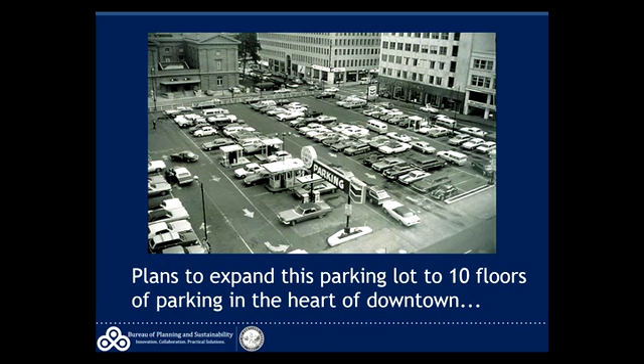Back to the picture of the parking lot, residents were beginning to see the need to quit paving over such wonderful spaces, and there was sort of a revolt when there was a proposal here at the site for a 10-story parking garage.

The result was this: Pioneer Courthouse Square, what we often call Portland's living room. It's a multi-use space right in the center of downtown, our version of an Italian piazza.

And similarly, I think the revolt against growing larger, like where I came from, Los Angeles or Texas City, all of that was kind of growing stronger.

As a result, we started thinking about transportation issues. We shifted the highway that was along the harbor, shown in the picture on the left, and in its place built Waterfront Park. If Pioneer Square is our living room, then Waterfront Park is more or less our front step. It offers a way for people to meander along the river as they head into downtown.

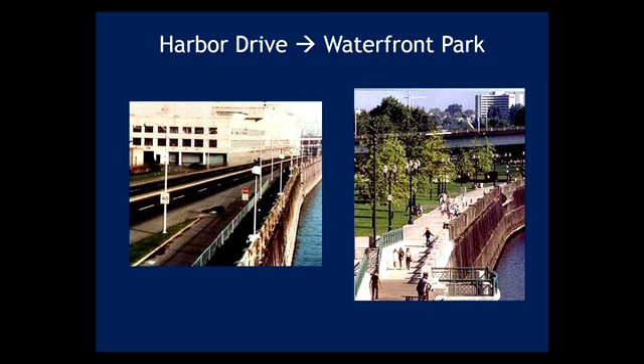The desire to continue building freeways, however, was very strong in many people's minds. This is a map drawn in the 70s and 80s showing all the new freeways we were going to have in Portland.

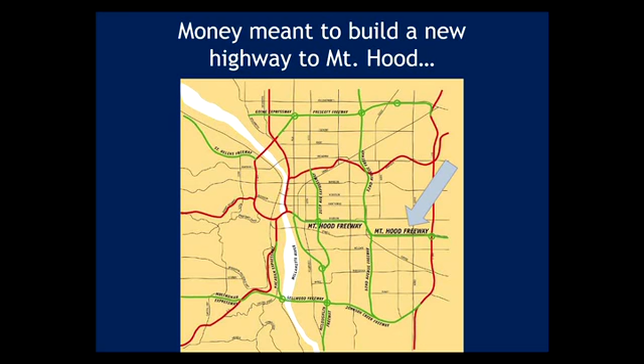I think there were at least 7 new freeways proposed, but our mayor at that time led another revolt all the way to Congress and used money that was dedicated for what's shown there, the Mount Hood Freeway, and built our first modern light rail line.

And we now have light rail in all directions, miles and miles of both light rail and streetcar. That first decision to shift huge federal, state and local resources away from the car and into public transit was sort of a watershed moment for Portland.

Cities all over the world are doing this now. At that time, we had the tool of tax increment financing, and we brought together tremendous public and private resources to develop what became the Pearl District.

The goal was to have 5,000 units of housing in this area. We now have close to 9,000 units, with hundreds and hundreds of companies and retails in this area and some wonderful parks.

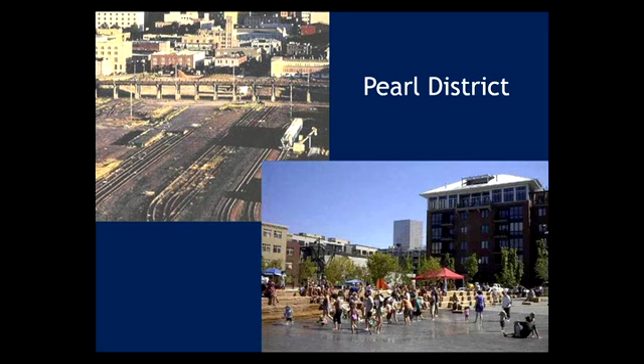So from that slide at the beginning, the long-term framework that the State of Oregon requires every local government to pursue, establishing how it's going to grow over the next 20 years, has actually been a really important part, and in a lot of ways a model for the work we do on issues like climate change, where there's nothing solved overnight with a few quick and easy policy or program investments. This is something that requires a systematic approach, long-term institutional change to deliver over time.

In Portland, we're really fortunate that the work on climate started so many years ago, more than two decades now, and Susan herself was instrumental in the very first carbon dioxide reduction strategy in 1993, 5¼ inch floppy diskette and all. We'll use these plans as a framework to talk through some of what I think really does differentiate Portland today.

It's also true that some of this is a cautionary tale, where we've been working on this for 20 years, and we still have a very long way to go. So we should be clear this is a marathon, not a sprint. We are making good progress, and we all really need to redouble our efforts to get there.

In that spirit, Portland now is on its 4th generation climate action plan. This one was adopted just a few months ago, and lays out essentially our trajectory for the next 5 years en route to this long-term goal of reducing emissions 80% by 2050.

And the previous work really is beginning to produce results. These are, I think, things more typically associated with Portland than the haze and brown cloud of the very first picture we showed. So we're now seeing significant reductions in energy use, a big decline in gasoline use per person.

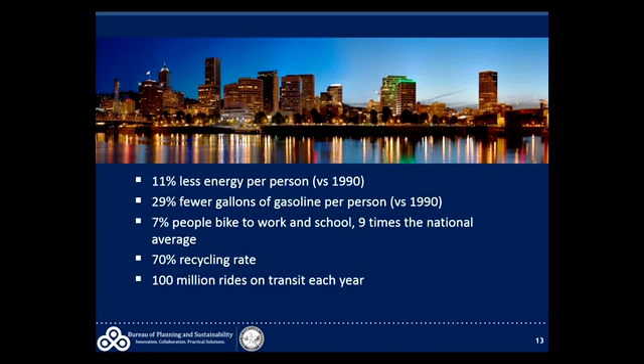We've got a bike commute rate that's now over 7%, 9 times the national average. Recycling is 70%. Transit ridership has doubled since 1990. The list of accomplishments just continues.

These are the things we love to talk about, and we will share these on this call. We'll also try to point out some of the areas that we're still wrestling with, and we get a lot of value from other cities in comparing notes on what works and what doesn't. We hope this can be in service to that kind of shared effort.

So green building, solar, eco roofs, investing in our natural infrastructure, and also working in our own city government. This has been a long-standing priority since the early 90s, and we're now able to point to utility bills that are $7 million less than they would be on a business-as-usual trajectory.

When we can illustrate how carbon reduction can drive economic and efficiency benefits in our own operations, that gives us a great platform to work with others in the community on.

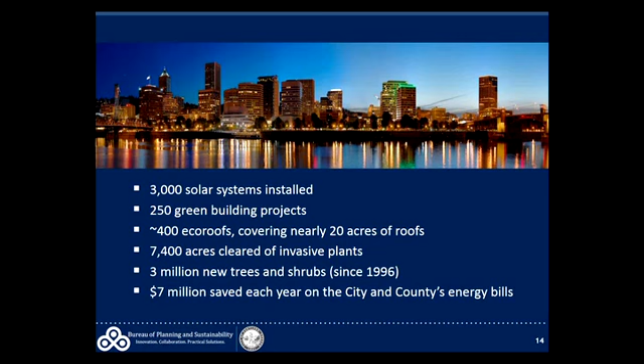So you put all of these together: energy, land use, transportation, recycling, waste reduction, all of these efforts, to get carbon emission trends, and this goes back to 1990. You can see the carbon numbers for Portland, here labeled Multnomah County because we do this as a joint city-county effort, and it is important to our efforts that this is not just the city, but we're working together with the county.

County-wide, our emission numbers are down 14% since 1990, and on a per-person basis, that's a reduction of 35%, since we've had really sustained population growth since that time.

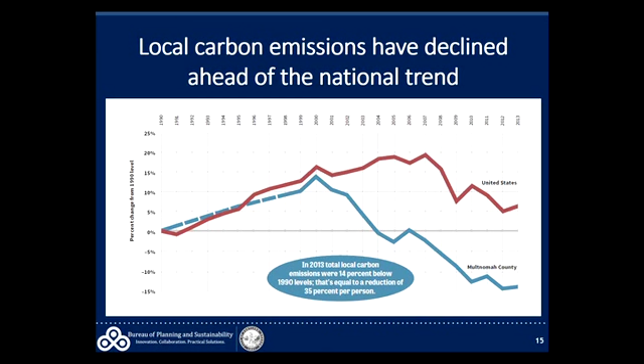It's both heartening to see the departure from the national trend, because I think work here began in earnest earlier. It's also really important to see that national trend bend down as well. We'll see what the numbers look like as we get into 2014, 2015. Certainly, we think we're going to be able to continue to reach this globally. We hope that the national trend follows that same pattern.

Equally importantly, I mentioned the population growth over that time, so up about 30%. We've also seen another 75,000 jobs added to Multnomah County. So even though emissions are falling, we're growing in population, we're gaining jobs. This is also a really important illustration of how it is possible to decouple local growth from carbon emissions.

We show this slide to visitors from China, and they take a picture of it. So I think it's an important model and trend that we need to continue ourselves. We all have an interest in seeing this pattern replicated elsewhere.

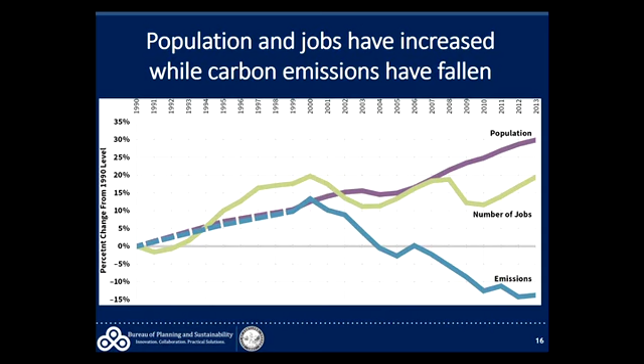We also know we have a ton of work to do ahead of us. So from that peak around 2000, emissions now are on a trajectory locally to get to this long-term 80% reduction goal. We've got an interim goal of a 40% reduction by 2030, so each on this 1.5% decline per year to get there, then step it up a little bit on down to 2050. But we are very roughly on track for the moment, and we've got our work cut out for us to reach those targets.

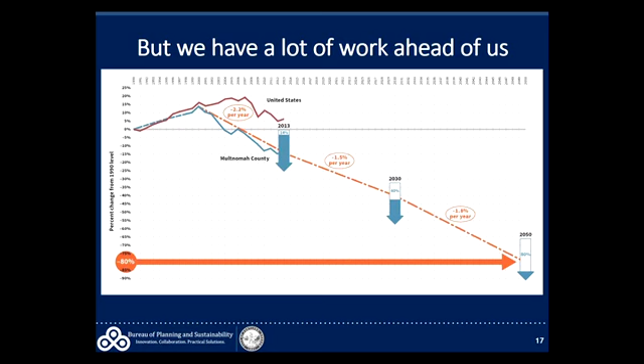Even while we've got these long-term carbon reduction goals, we're looking at continued growth, and that creates a lot of opportunities in terms of how the community is shaped, our transportation systems, how people get around, and what's close to them. We're seeing opportunities to build out neighborhoods that are more walkable, well connected by transit, by bike paths, and other transportation options, and we're going to need those things if we add these 270... this must be on the next slide.

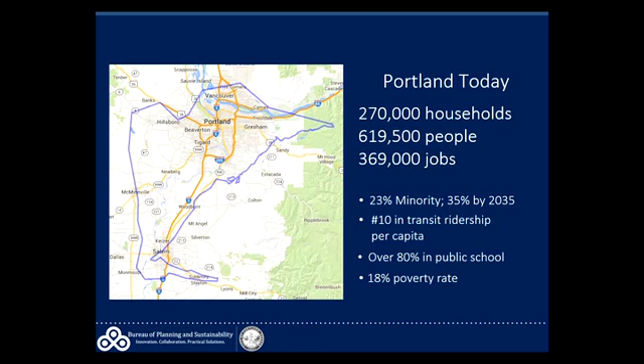To our current 270,000 households, we're expecting another 120,000, so 2% annual growth, and expecting another 140,000 new jobs. This is over the next 20 years. We're planning for that, and our comprehensive plan shows that we can accommodate all of that growth within our existing land boundary.

And that's a really fundamental intention here, that this is how we're going to grow. We're going to grow up, not out, and we're going to serve that growth with really good transit, walkable neighborhoods, and transportation options, and we're going to do our best to keep that affordable, both in terms of the cost of housing and the cost of owning and managing our transportation needs.

This is really where climate work fits in this larger context. If all we succeed in doing is reducing carbon emissions, we're absolutely not getting to our goals. In the introduction, there's a reference to the Portland Plan, a citywide strategic plan adopted a couple of years ago, which very clearly articulates our goals to be a healthy, prosperous, and equitable community, and we need to be achieving those even while we're growing and reducing carbon emissions. So if we do our carbon and sustainability work, it's integral to be advancing these other community priorities at the same time. That's not always easy, but it often is doable if we're really deliberate about it.

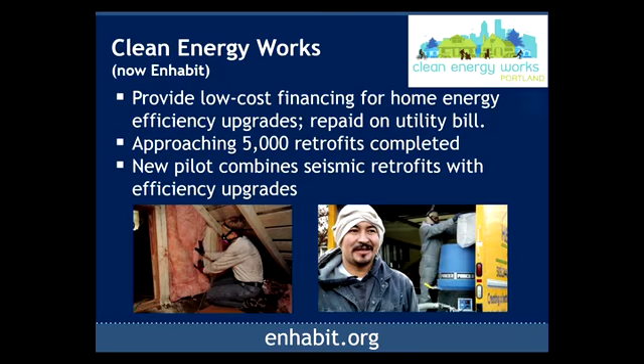And now Clean Energy Works is also looking at upfront cash for solar. You may not think of solar and sunny Portland in the same sentence, but we do have relatively strong support for solar and for other renewables, wind and others, with statewide tax credits and incentives.

Many people also probably think of the Northwest as that place that runs totally on the power of the Columbia River, and that's just not true. It is pretty true for Seattle because they were smarter than we were in that they created a public utility very early on, and the federal government gives sort of first dibs on federal hydro projects to publicly owned utilities. So we get some of the benefits of that whole system, but not like Seattle.

Anyway, we get our power from two private electric companies, and one of them, in particular, Pacific Power, is still a major coal power generator. So those coal power plants are not in Oregon, they're in Montana and other states, but the power is then transmitted to Oregon. We do have one coal-fired plant still in the state.

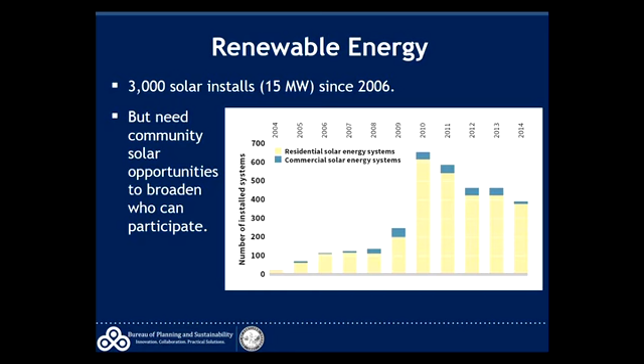Funding for that effort pretty much died out for a little while in 2013, but we have been able to keep a lot of the momentum going. The program that really made the big shift for us was very

neighborhood-based, and we called it Solarize Portland. How it worked was neighbors would join together, and anywhere from 30, 40, 50 or more households would agree to buy a solar PV system. And then we would help them with the technical issues to make a bulk purchase with a request for proposals that would then come in, and all that together would help to reduce costs significantly.

A lot of what we did really was just kind of hand-holding almost and kind of sorting through the issues. When you go to do something like this on your own, it's kind of scary. When you go and do this with all your neighbors, it's not only not scary, it's sort of an empowering kind of thing for the neighborhood to do. So it's been super successful.

We actually got the funding to do this, so I think this is important for other cities, from our Economic Development Fund at one point, to manage and kind of coordinate the effort. Once the recession hit, some of those funds have dried up, but we felt like there were huge job opportunities, and we wanted to be able to actually use some seed money from economic development to show that indeed you could have a major impact on job creation locally, because when you do these projects, so much of it is labor.

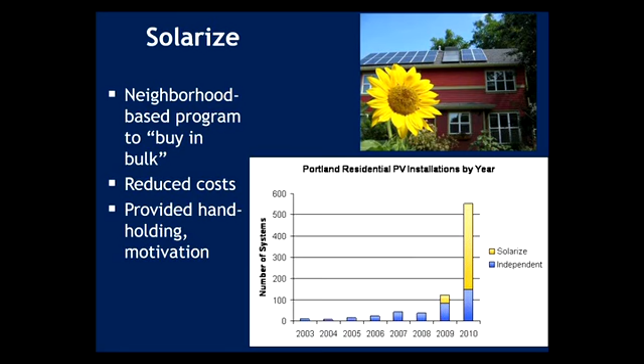Michael. All right, so changing gears to urban form and mobility.

I mentioned earlier that a really fundamental piece of our climate strategy, and really our comprehensive plan, is to create walkable neighborhoods where people can access most of the things they need on a daily basis on foot, and then you connect those neighborhoods by convenient, affordable transit and bikes. And so that's really what our mobility strategy is based around.

We are growing. Our intent is to build up, not out. We have the zoning to do that. We're making some updates to it right now, but there is plenty of room, and it's going to make all of these systems much more efficient and much more affordable as we make better use of existing infrastructure.

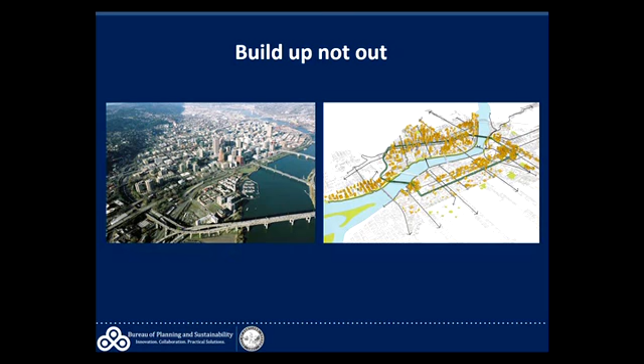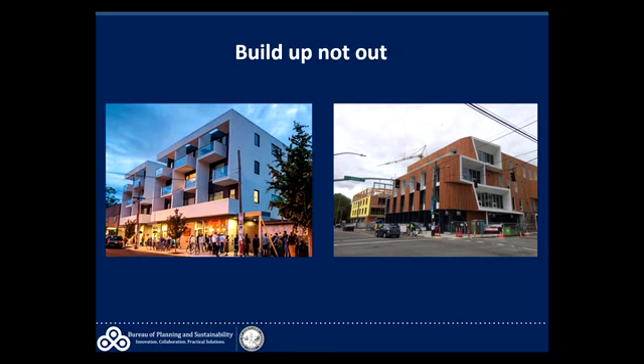You see some of the examples of the development we're seeing along our transit arterials, and this illustrates the human scale of Portland. We're not a skyscraper town. We've got a lot of this kind of neighborhood Main Street scale of development, very lively street level retail, lots of activities, pretty nice feel to it, and we've got a lot of room for more of that. So a lot of our investment is channeled in these directions.

On the east side of town, we have areas that were annexed to the city much more recently, many in the 90s, so they developed without the same development standards that are routine in urban areas, and they literally don't have sidewalks. These are big investment needs, and this helps reveal that and focus our resources to serve those areas in the long run with walkability.

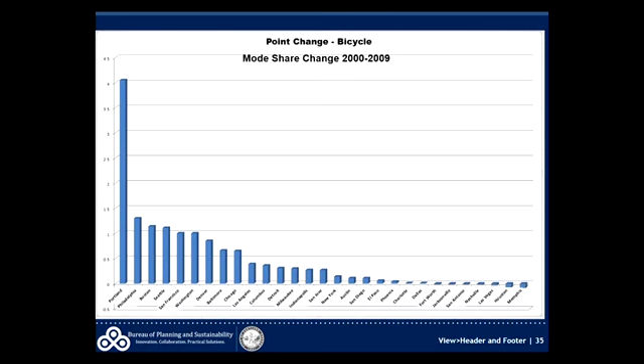One of the really compelling examples of this in Portland is a new bridge across the Willamette River in downtown Portland. This was under construction probably last year. This bridge was completed and opened to the public just last month. It carries light rail, streetcar, buses, bicyclists, and pedestrians. It does not carry cars.

As an example of the kind of investment where we are putting our money where our mouth is on this - this bridge is the kind of infrastructure that we are going to want in the future, and so we're putting our money into it.

It's also a good example of climate-proofing, future-proofing infrastructure against climate changes, where the Willamette River here is tidally influenced - so we're upriver from the ocean, but the river levels are influenced by tides. We reran numbers based on some of the climate projections and realized it was in our interest to raise the bridge span a little higher than the original design. So the engineers went back and changed that design, and we're a little better future-proofed against climate changes. It's a really fantastic experience.

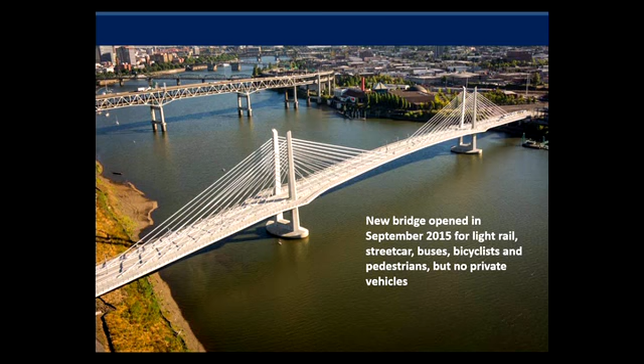One of the things that surprises me about going over the bridge that I really, really love is how quiet it is. This bridge doesn't have the rattle of wheels of many, many cars and trucks, and it's a very peaceful experience. So not only are you getting less air pollution, but you're getting less noise pollution. I like going across it.

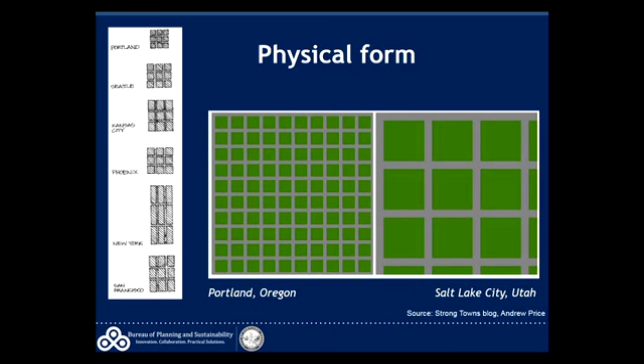From this next map, you can see that not all of Portland has these great blocks, including the eastern portion of the city that Michael mentioned earlier when showing the picture of the 20-minute neighborhood. When we say a 20-minute neighborhood, we mean that within 20 minutes you can walk and get access to pretty much all the things you need on a daily basis: stores, libraries, parks, beer and wine, restaurants, and other important features. So much of the city does have that, but not all of it.

Part of the eastern part of the city was actually annexed about 25 to 30 years ago, and it pretty much resembles much of suburban America, much of suburban Portland. Some areas even have a semi-rural feel: large blocks, lots of missing streets that were never developed, and unfortunately large areas without quality sidewalks.

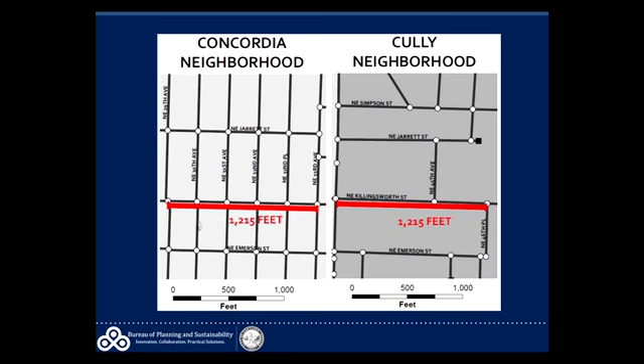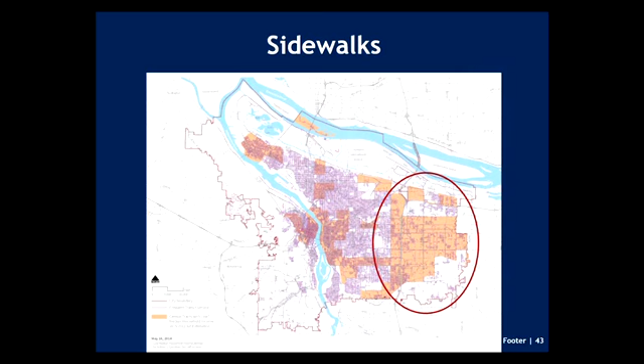So when most people think of Portland, sort of the Portlandia image, it's the area to the west of the circle there—very bikeable, walkable, a wonderful close-in neighborhood. But unfortunately, in the eastern portion of the city, there aren't a lot of grocery stores that are easy to get to, a lack of parks, a lack of transit. It's also an area where many lower-income families and people of color have been moving to over time.

Part of what's happened, just like in a lot of other cities, is that as the city becomes much more popular as a destination for people to move to, housing prices have gone up, real estate prices have gone up for businesses. While we're doing many things around trying to impact affordability, there is still some displacement, and some of that displacement is ending up outside of the city, but also more in East Portland.

So this is again where sustainability isn't just about carbon emissions in the environment—we're very concerned about affordability. As we look at where we should be spending our very limited affordable housing dollars, we're looking at maps like this, where we hope to increase investment in affordable housing specifically in the areas that aren't orange. So we want to add people into areas that have a large number of amenities, places where there is great transit service and other services.

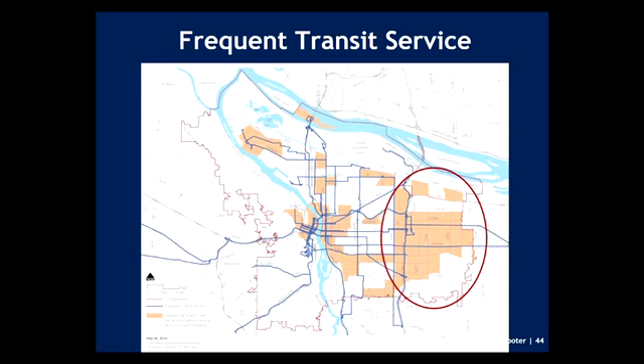The inequities that Susan was describing really emerged as the dominant, overriding issue in our citywide strategic plan, the Portland Plan, that was adopted a few years ago. And we are working on every front to address those, including through our carbon work.

As we went into this most recent update to our climate action plan, we did so with a very deliberate attempt to bring in voices that hadn't been at that table previously, to really try to look at climate work through an equity perspective.

That started with doing a whole scan of our previous climate plans, looking at others, seeing what people had done. We convened an equity work group of organizations across Portland that are equity advocates, trying to advance the interests of different perspectives and different communities.

We were fortunate to get an outside grant through the Partners for Places matching fund, with the Urban Sustainability Directors Network and the Funders Network for Smart Growth, that let us provide resources directly to these organizations to help us think this through. You'll see some of the results here in just a sec.

We're also getting to an implementation guide. So yes, we need to carry out the climate plan, and we need to do it in certain ways with certain considerations, being really mindful of where the impacts and the benefits go. In the resulting plan, you'll see there's a very clear top-level vision that addresses equity.

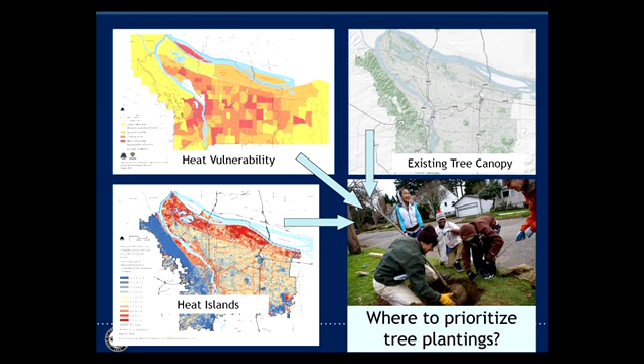So just to illustrate how this ends up playing out in real life. I think we have about 5 more minutes, and then we want to leave some time for questions. So we'll talk through a couple of these things pretty quickly.

Okay, I'll jump in here. I'm going to switch to solid waste and consumption. About 5 years ago, we took a pretty bold step, and we turned our residential garbage system upside down. We have large containers for recycling, yard waste, and food waste, and smaller containers for garbage. The garbage only gets picked up every other week, while recycling and compost gets picked up every single week. The result was an instant 37% reduction in garbage.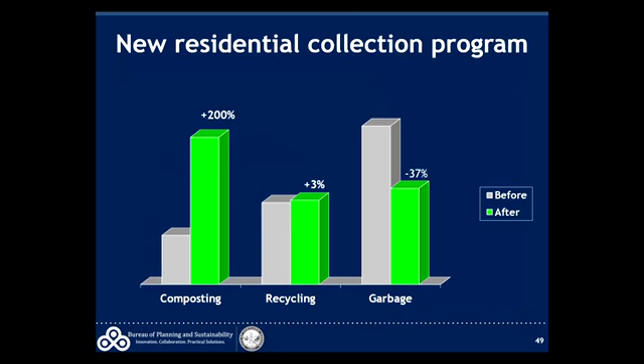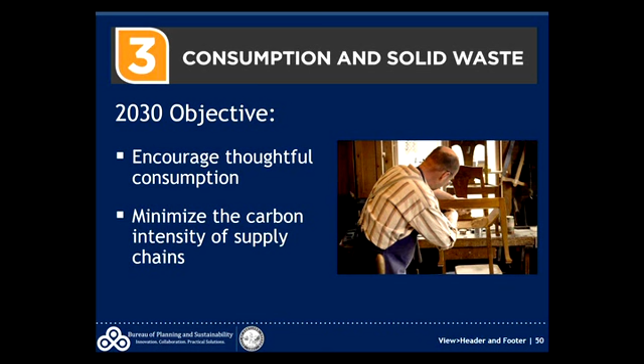Overall, this has led us to a 70% recycling rate, about twice the national average. We're also spending an increasing amount of time focused on keeping waste out of the system in the first place by buying more durable goods, helping residents think about ways to fix what they have, to invest in experiences instead of just buying more stuff. We also work with companies to help them minimize the carbon intensity of all the products and materials that they use to make their products.

Many of you have probably done some kind of carbon inventory, either for your company or for your city. It looks like something on the left there usually, which is a production inventory. In Portland, shows 45% of our emissions come from the energy used in buildings, residential and commercial, a little under 20% for industry, and a little under 40% for transportation.

The pie chart on the right really took us in a different direction to create, which was looking at the inventory of carbon emissions from all the various products and services that we buy every day. So it includes the energy used to make and transport and sell the products or services. It's a really helpful tool for cities or for individuals to better understand how to reduce their own carbon footprint. And we can explain more about that if you want.

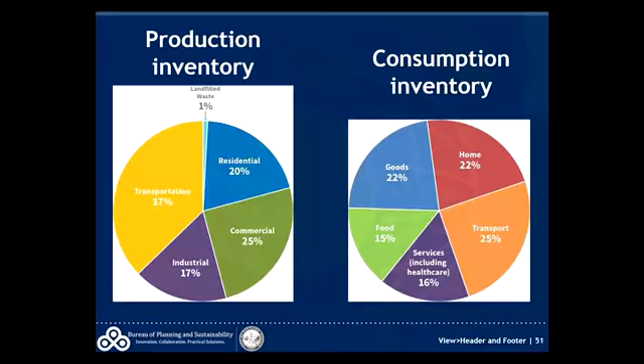We'll also explain this picture more later in the interest of time, but generally what this is trying to show is when you merge those two circles together, the blue on the right is all the stuff that we import - everything from Asia, from the rest of America, and all the energy we use and the emissions that came from everything we buy from someplace else. The green part is what we generate in the city and use in the city. And then the red circle is stuff where we generate emissions here, but we export it to someplace else.

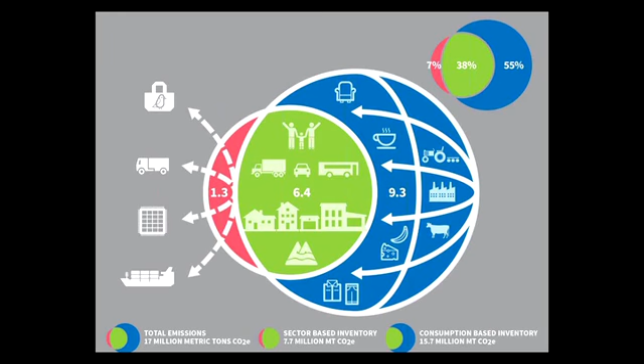I want to switch briefly to talk about walking our talk. What are we doing in our own city government to make a difference around energy efficiency, renewables, recycling, more efficient fleet, and such?

As Michael mentioned, we're now saving about $7 million a year on our energy bills, one project after another. As you do each of these projects, you don't think they're going to add up to be this much, but over time—and this has really been a couple decades of work...

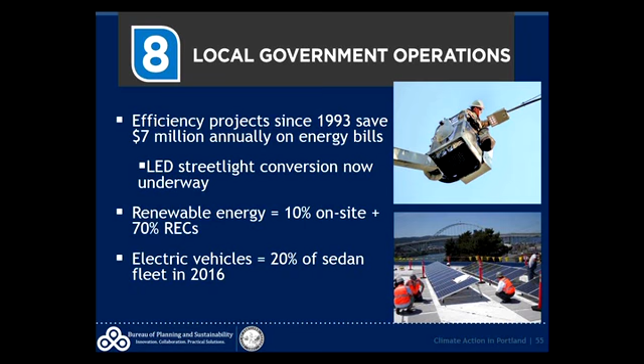...doing everything from lighting projects to major overhauls of water and wastewater systems. We're at about 80% renewable power for electricity we use, and we'll be at 100% hopefully within a year. We're also shifting about 20% of our fleet to electric vehicles. We recover an enormous amount of energy out of our wastewater treatment plant—a little under $1 million a year they save by generating power they can use on site.

I think we have 500 kW of solar already, and we're close to having 700 kW of solar on our own facility. That's a lot, and we have a lot more coming soon.

Another fun project is with a company called Lucid, a local company, where we put into the actual water system the ability to use the pressure of water just flowing downhill from our reservoirs in the mountains to generate electricity.

One last comment before I hand it back to Michael: we found over the years that by being an early adopter of all these sustainable products, technologies, and services, we have grown a lot—hundreds of companies related to green building, energy efficiency, renewables, waste reduction, stormwater management, and all those things. They do serve us locally, but more than probably 70% of their work is exported elsewhere, working anywhere from California to Dubai and the rest of the world.

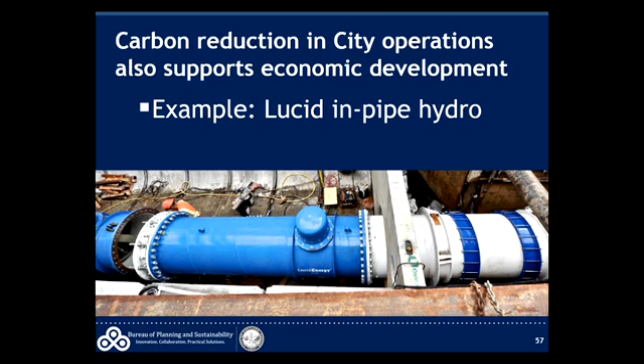It's become sort of the center point of our economic development strategy. We do a lot with software and athletic wear, like Nike here in Portland, but the whole area of building greener cities has become an economic powerhouse for us also.

That slide's sort of out of order, but it's our LED streetlights. And I'll hand it back to Michael.

The last topic here is climate change preparation. Climate change is happening—we're already seeing it, and it's only prudent to prepare for it. So we went through a fairly detailed process of assessing the risks Portland faces, identifying vulnerabilities, and then developing a strategy to respond to those vulnerabilities.

We're somewhat fortunate here in Portland—when you go through all the scenarios, we're a little less vulnerable than a lot of communities, and we thank our lucky stars. But we still really need to pay attention to some of these issues.

Our approach was to look at our risks and vulnerabilities in infrastructure and built systems, look at natural systems, and then look at impacts on health and human services. This is the process that led us to recommendations. The details are much less important than the process—the conclusions are very specific to Portland's geography and demographics.

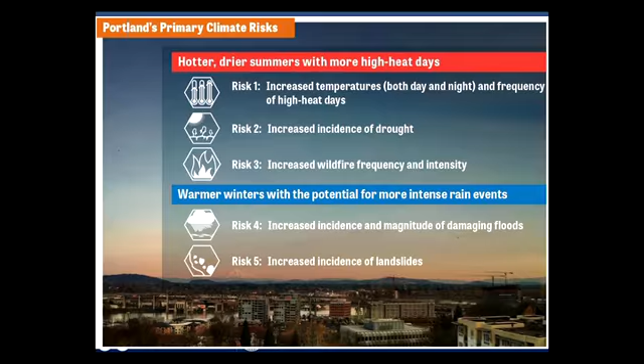For us, this led to some really important conclusions: we need to continue investing in green infrastructure and natural areas. We also know our climate is changing—we're expecting more drought in the summers and certainly warmer winters, which has impacts on snowpack, not immediately to Portland or our water supply, but certainly on the larger region. These are really significant changes.

There are a lot of things we're still getting our heads around, especially how air quality may be affected by more extreme heat events and fairly important microclimates within the city. So we're going to invest in additional sensors to understand this better, and analysis to do that, often in partnership with Portland State University.

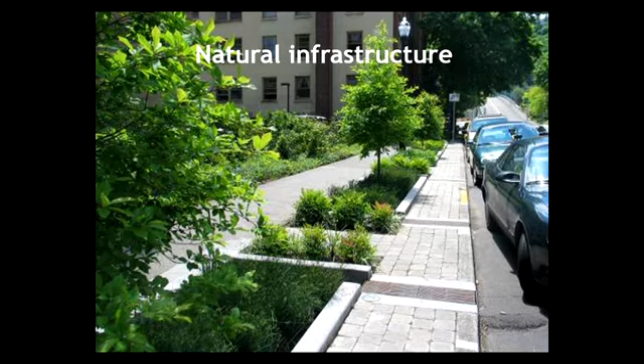So to wrap up, I think the big takeaway from all our work over the years is: if you pursue sustainability in your city but end up with a city nobody wants to live in, that's not a success. Everything we do has to advance equity and quality of life. People like to have fun, and they like to have fun when they're doing these projects, and definitely when they're done with them. So reminding ourselves that quality of life is fundamental, core to all the work we do, certainly anything related to sustainability.